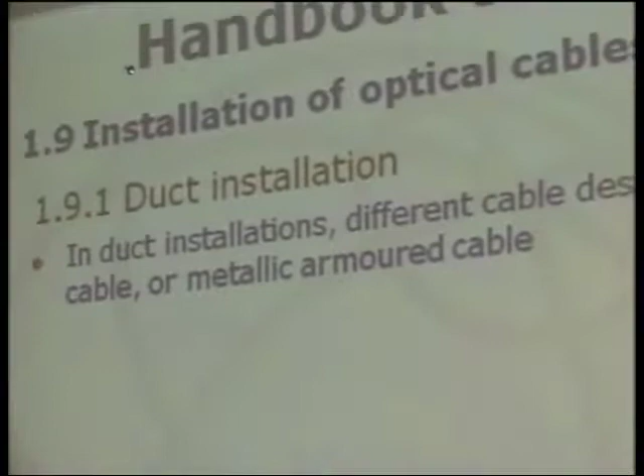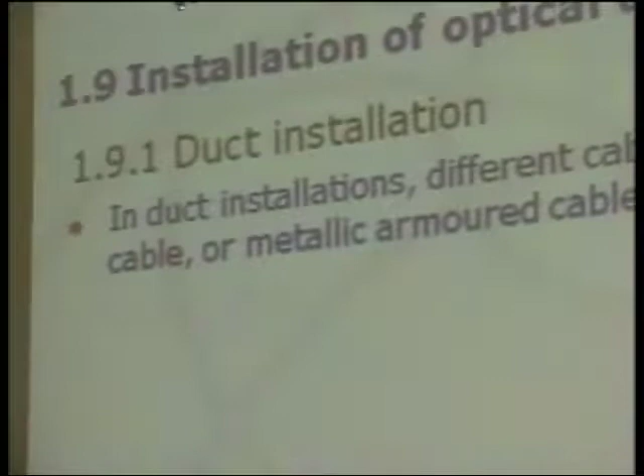totally dielectric or metallic armored cable. If this duct is free of other influence, sometimes it's useful to have more than one duct in an infrastructure, and sometimes one duct is used only for communication cables. In this case, it's sometimes better to use dielectric cable.

If there are situations that could pose some risk to the cable, it's better to use armored cable.

Depending on the cable design and the method of installation, we use the traditional way to pull by the end, or the blowing method.

In any case, it's always necessary to take precautions to handle the cable well, to choose the splice box and install it correctly, and to have excess length of cable where the job needs to be done.

In this kind of application, personal security is very important because sometimes we have high-speed trains, and people need to work on the cable very nearby. It's necessary to do a good survey, to choose the right place to put the splice box, to avoid putting in danger the people that will later do operations or maintenance on this kind of cable.

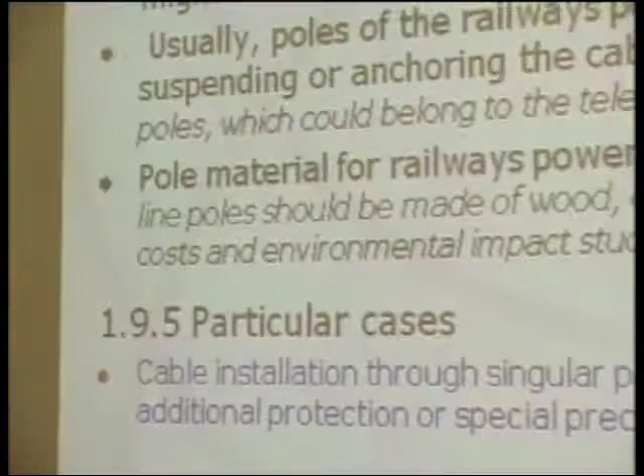Sometimes when trying to put optical cable in this environment it's easy to find some infrastructure, but sometimes it's necessary to put some extra poles just to meet the necessities of the cable installation. There are some particular points listed in this recommendation, put in the handbook.

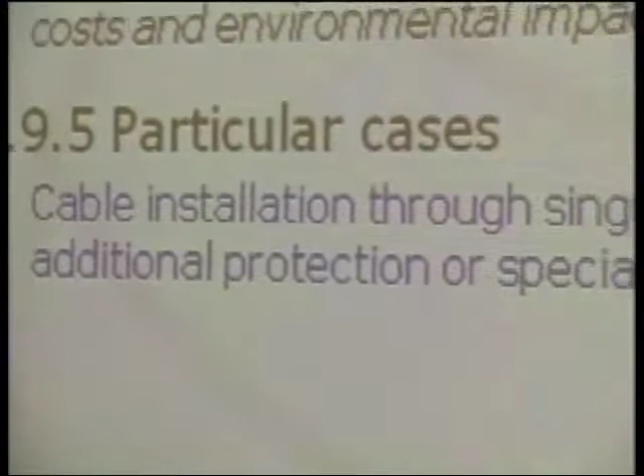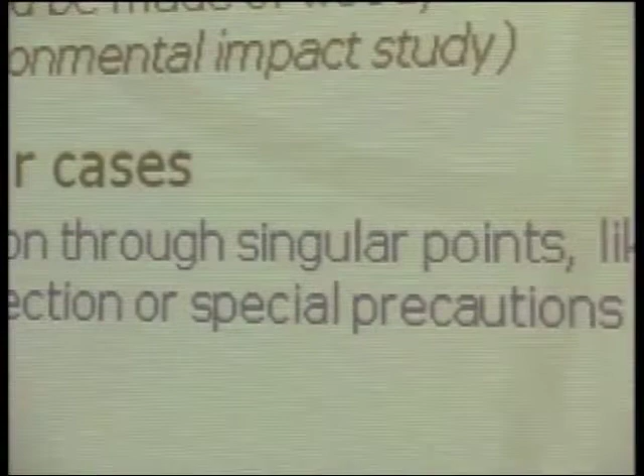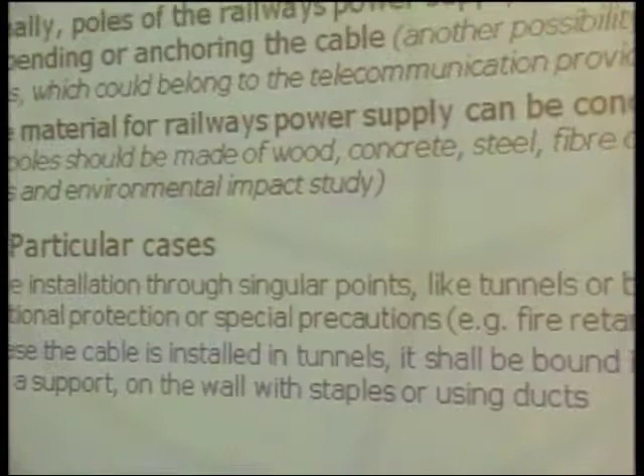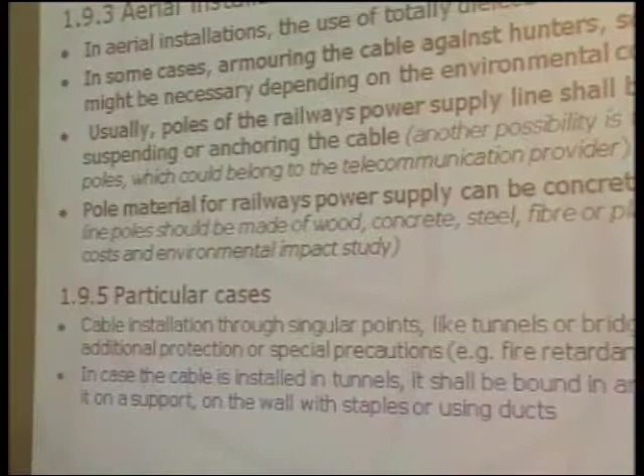In case the cable is installed in tunnels, it should be bound in an appropriate way, fixed on a support, applying all the recommendations of the other text we discussed before, on the wall with staples or using ducts.

It's almost the same information we have for normal bridges and tunnels. On a bridge it is always recommended to use ducts. There are some points that are pointed out in this recommendation.

Referring to poles, when using the railway's power supply pole line for the installation of the optical cable, the cable can be suspended from the field side or from the railway side. Almost all the time we have the poles installed to run the trains, and the cable could be on one of two sides.

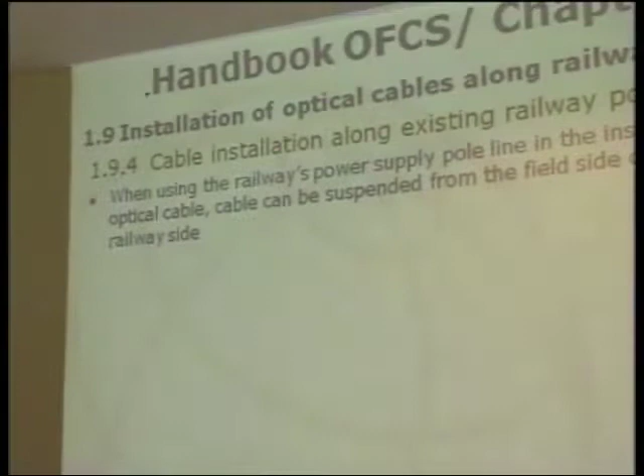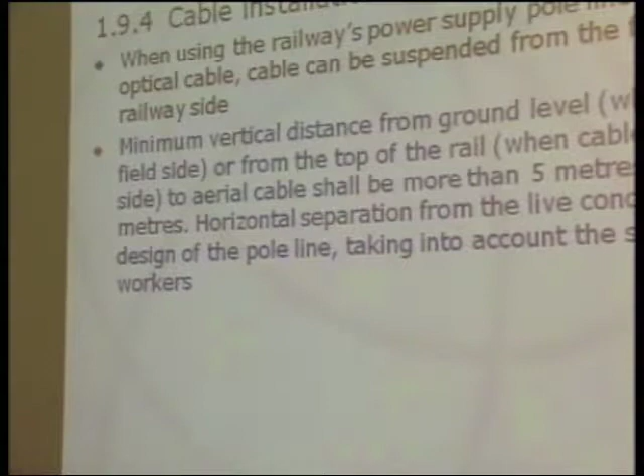There are advantages here, and it's better to look at each situation. The minimum vertical distance from ground level, when the cable is installed on the field side, or from the top of the rail, when the cable is installed on the railway side, the recommendation is more than 5 meters and less or equal to 10 meters. The idea is to put the cable far enough from the tracks that it won't be affected.

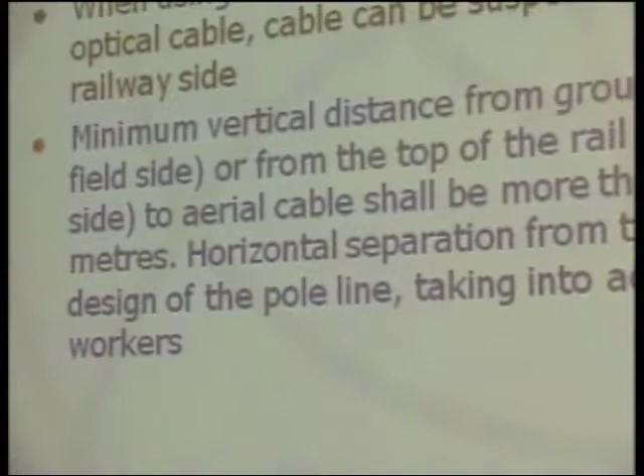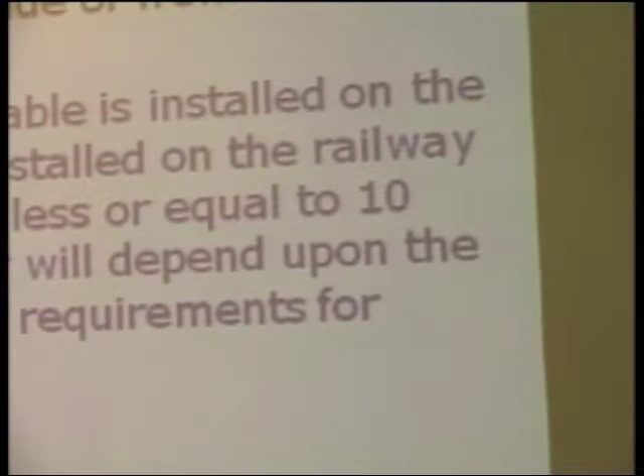Horizontal separation from the live conductor will depend on the design of the pole line, taking into account the safety requirements for workers. It's a very specific situation; we need to take care and use varied skills to find the best way.

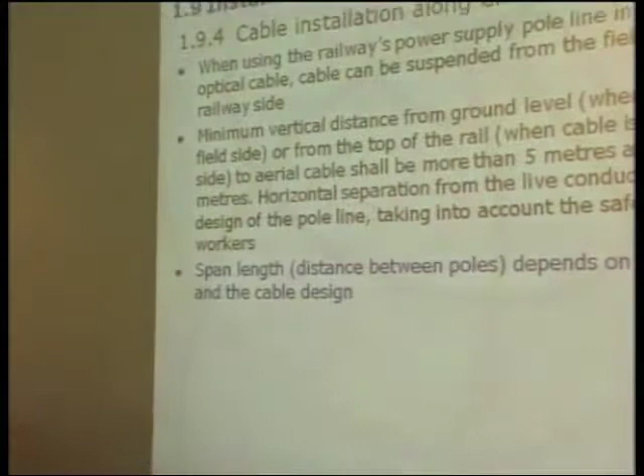The span length, the distance between poles, depends on the laying characteristics and the cable design.

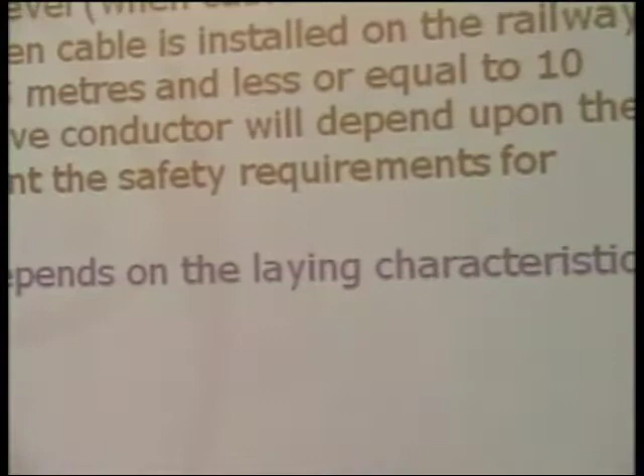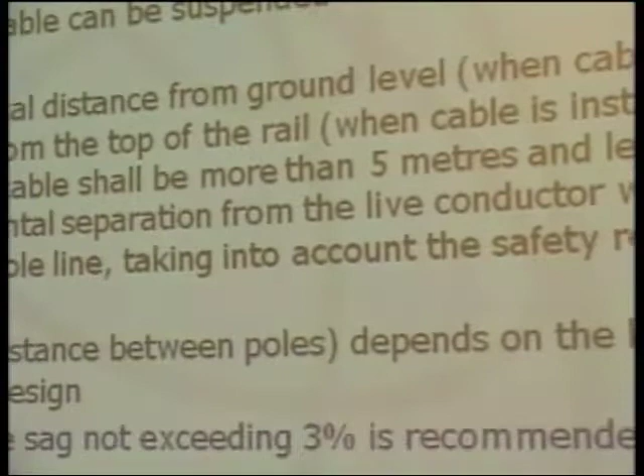There are a lot of poles in between that were designed for running the railways. The optical fiber cable project must find the right poles to give the span necessary considering the cable design, and there's a recommendation about nominal cable sag. It's good not to exceed 3%.

Splices, when installed in manholes, can be made either inside or outside the manhole. In both situations, we should consider the characteristics of the splicing box, the manhole, and the cable, as well as personal security. The main point of this recommendation is that we need to use the experience of other applications, but also consider the particularities of this installation.

In any case, a length of cable should be stored in the manhole to allow correct fulfillment of the splice. It's recommended to have 5 meters on each end of the cable for splicing. When we decide to do the splice outside the manhole, the recommendation is to use 10 meters on each side of the cable.

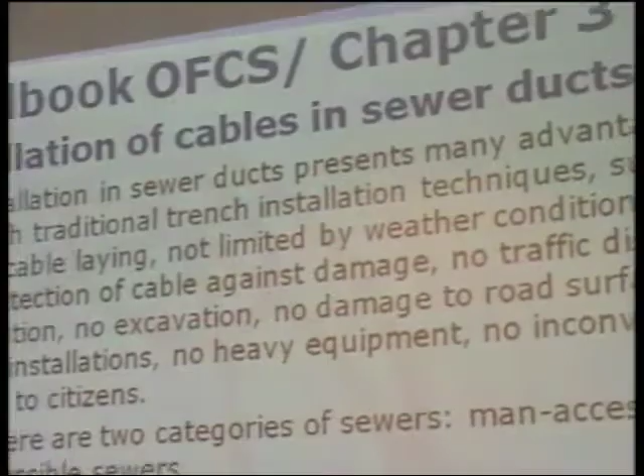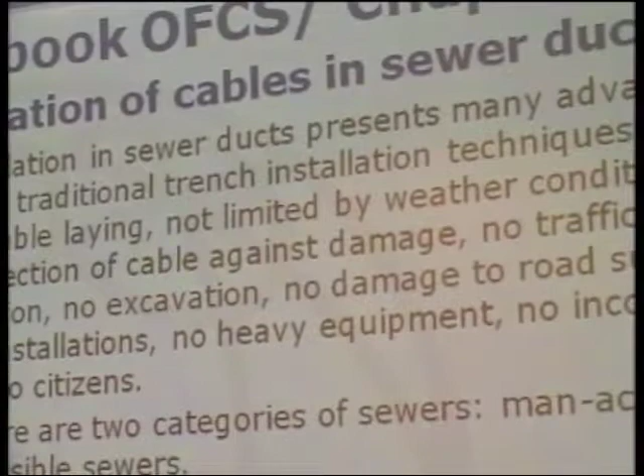In general, there are two kinds of sewers: the one where a man can go inside, called man accessible, and the kind where that's not possible, called non-man accessible sewers. The definition of where a man could access or not depends not only on the regulation that each nation or country has, but also on individual regulations of different sewer network operators. It depends on the country, the administration, and also the sewer company. Usually, when we have diameters between 200 millimeters and 700 millimeters, we consider it non-accessible to man.

In this case, the installation of an optical cable in these non-man accessible sewers is carried out using a kind of mechanical apparatus, usually called robots. In the case of man accessible sewers, we can use robots, or we can use manual installation of cable.

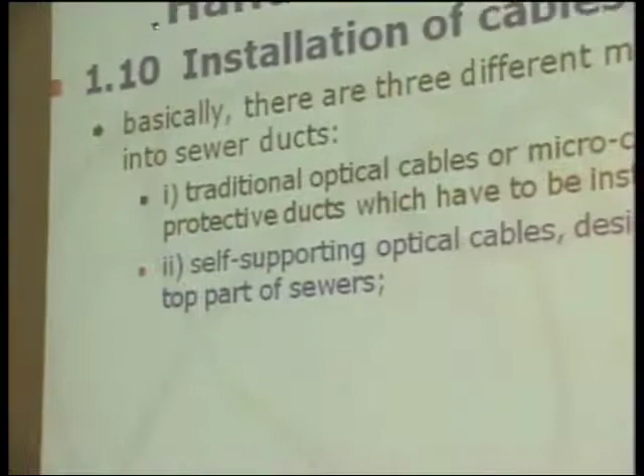There are some different methods to install cables into sewers. The first one is traditional - you use traditional optical cable or micro cable. They are specially designed to put in protective ducts, and the ducts are usually installed before the installation of the cable. The second one is a kind of self-supporting optical cable, specially designed to be suspended in the top part of the sewers. And the third kind is a kind of armored optical cable that's designed to be installed directly in the bottom of the sewers.

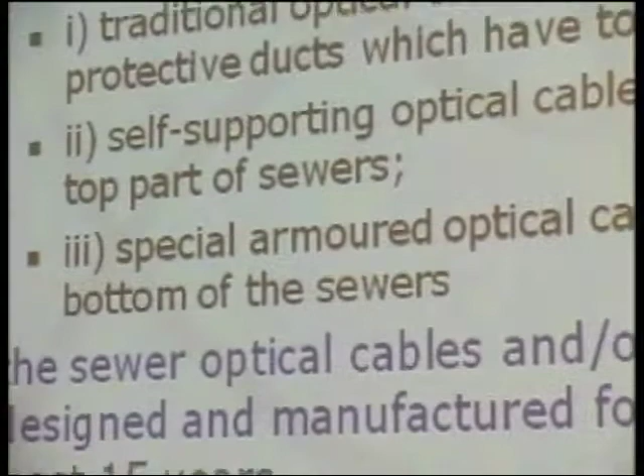We have three different kinds of networks we can build inside the sewers. The sewer optical cables and related infrastructure must be designed and manufactured considering an expected life of at least 15 years. It should be possible to install and remove the cable during this operational life. That's the recommendation for the project of the cable and the system.

The materials used in this sewer optical cable and also in the related infrastructure shall not present a health hazard within its intended use. There is a recommendation on this topic, and this recommendation is the L77.

First, it's necessary to get a lot of information about the structure condition. What is the sewer network in the region the company intends to put the optical cable? What part of this network has pipes that could be reached by a man, or where it's necessary to use robot installation? What kind of different structural changes occur in the path where we intend to put the optical cable - sometimes there are collapses, pipe junctions, and devices used to control the sewers that it's necessary to take into account for the project.

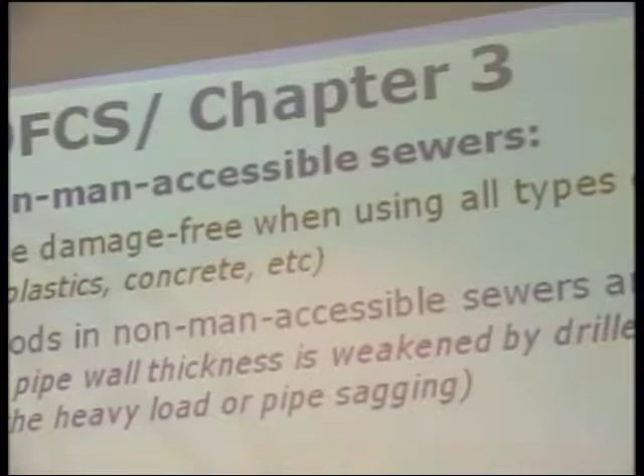Especially when we deal with the anchoring installation method, it's not recommended, because the sewer pipe wall thickness could be weakened by drilling holes, and might break due to heavy load or pipe sagging. The idea is to avoid that, and instead put special clamps that hold the cable in position without mechanically damaging the pipes.

One of the recommended solutions is to put a protective conduit, fixed by using a robot to the sewer ducts using special clamps equipped with clips. After that, the cable should be blown into these conduits, ensuring the conduits are in the right position, and that these specially designed clamps can fix them without doing holes, sustaining the conduits in the flow we normally have in the sewer, always without damaging any of the pipes.

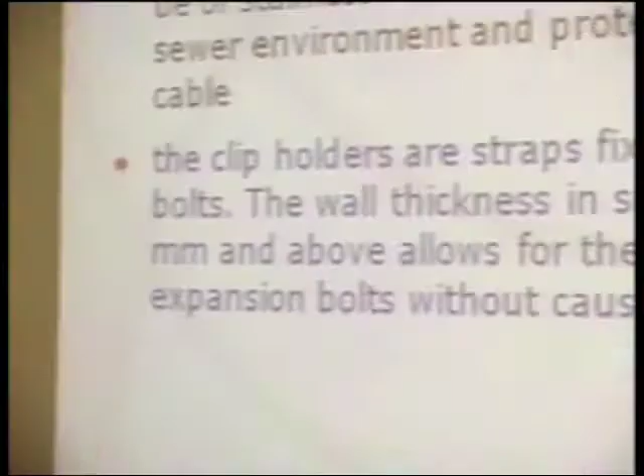The maximum number of protective conduits that could be installed depends on the clip holder size. In general, each clip holder allows the operator to install up to 4 clips and conduits. We first put the hole, and after that put this structure of clips used to install the conduits.

The main difference is that in the first system it's not possible to drill holes into the pipes, and in the second one it's possible.

Some information about the installation of special armored optical cable in sewer ducts. Once we have all the conduits put in the right place, the installation of optical cable pulled in and laid on the pipe is the easiest solution to deploy the optical cable.

Fastening the cable into sewer pipes is not necessary because gravity keeps the cable on the floor, and the condition of the pipe is very important. In this case, we have that kind of armored steel protection, and the cable is just put in the bottom part of the sewer, staying in a very comfortable situation if the condition of the pipe is relatively steady.